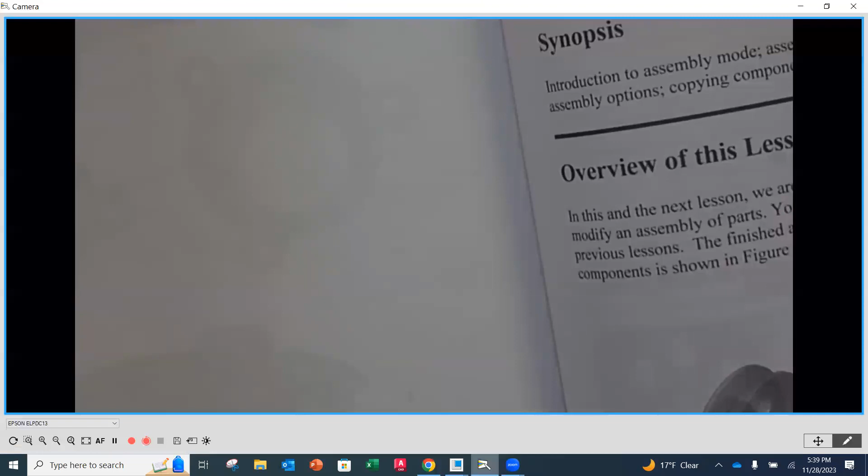It says chapter 9, and then it has axle and base and bolt and so on. These are the individual parts that you're going to be using to create the assembly in this chapter. Now it says here, read all of chapter 9 and work the tutorials of the support subassembly and the pulley assembly. So I'm going to open up our book and we're going to look there. Again, no need to download or click or anything right now.

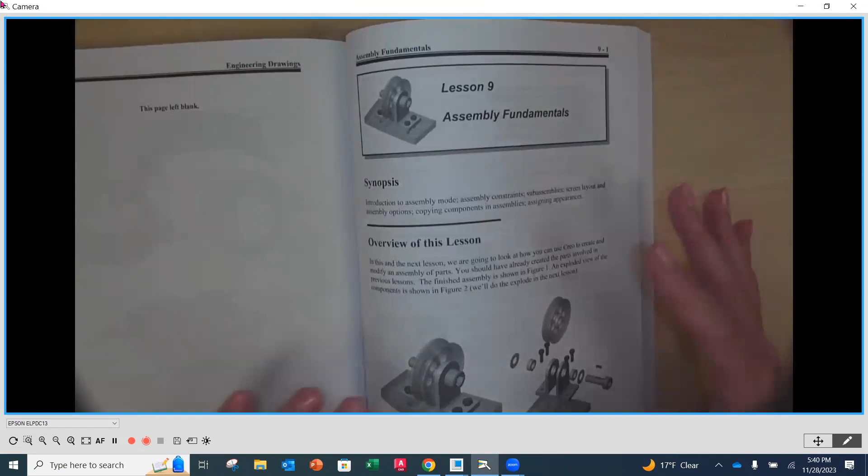So as we look at lesson number 9, or chapter number 9, assembly fundamentals, what we're going to be creating is this assembly right here. We're going to be putting this pulley and the L bracket together with an axle, a base plate, and then some fasteners that are going to fasten it down to that plate.

No clicking right now, please. I'm doing an overview of what your next assignment is going to be.

All right, so I want everybody's attention. Lucas, can I have your attention?

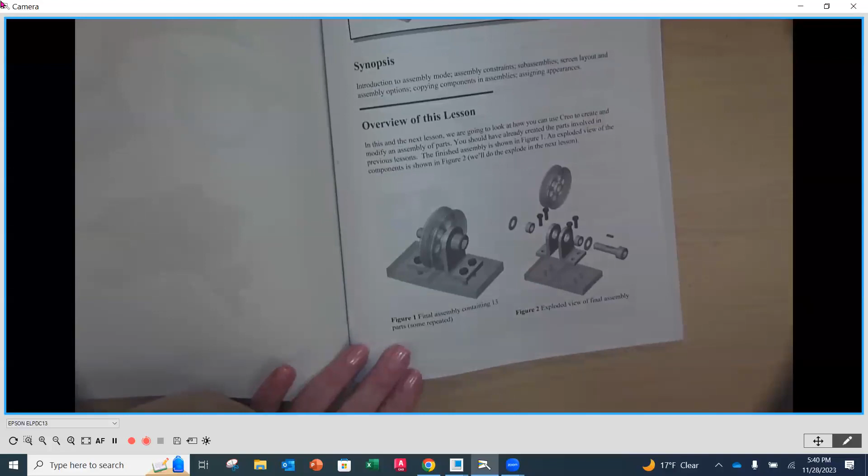Thank you. So as we look at this assembly, the individual parts are the ones that I have for you to download there. You don't have to create them. Earlier in this book, they were setting them up in different places.

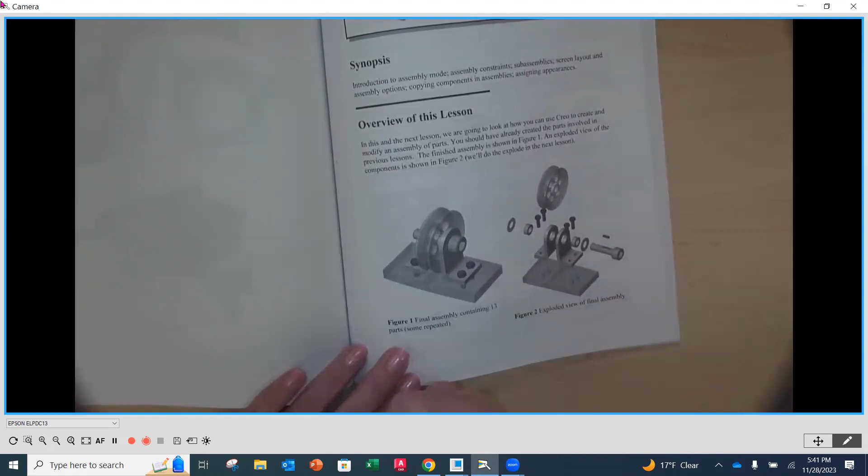We haven't been using the book all that much, and I apologize for that. I don't apologize, it's kind of not a great book, but I'm trying to use as much as possible because you purchased it. And so for this one, these are the parts that you're going to be using to put in there, so you don't have to create those. You're going to focus on just the assembly portion.

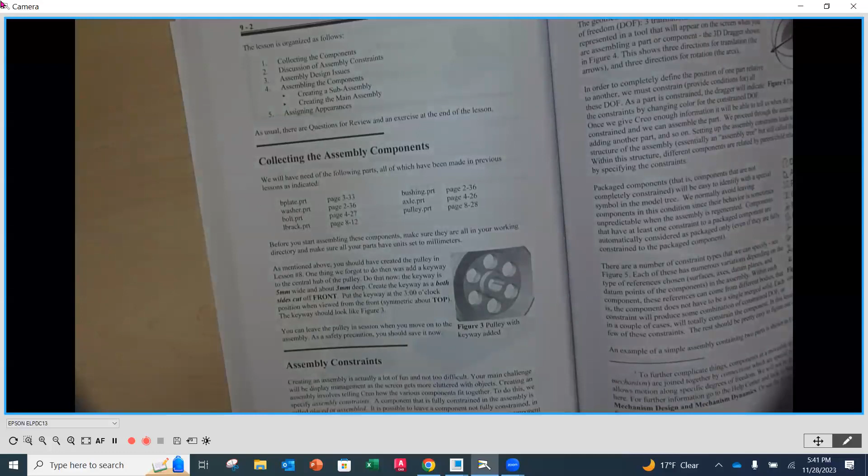Now, as we turn the page here, you're going to notice that they're going to do some background information on assemblies, and it talks about collecting those assembly components. Those are all set for you. You just download them from the Canvas page there.

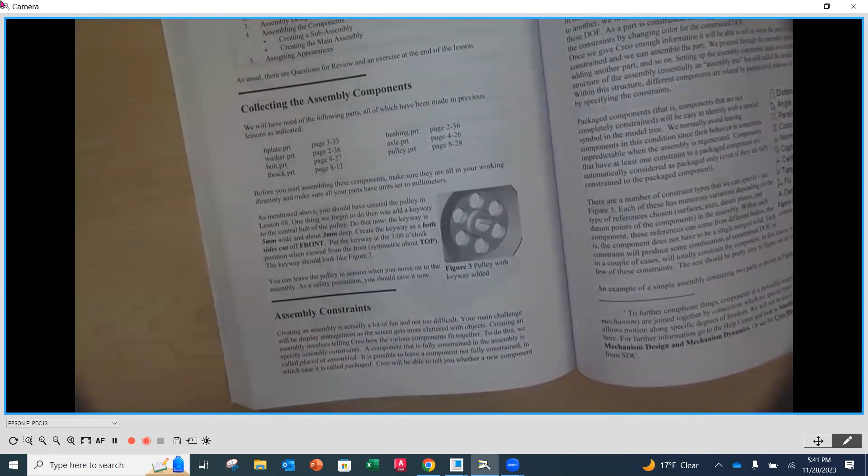And then it's going to talk about the different constraints. Now, I don't see the purpose of me just lecturing to you about these constraints. I think it's better if you go through and you actually use them the way the book is having you do them. I think they do a great job of having you test these out. They explain them and then they have you use them.

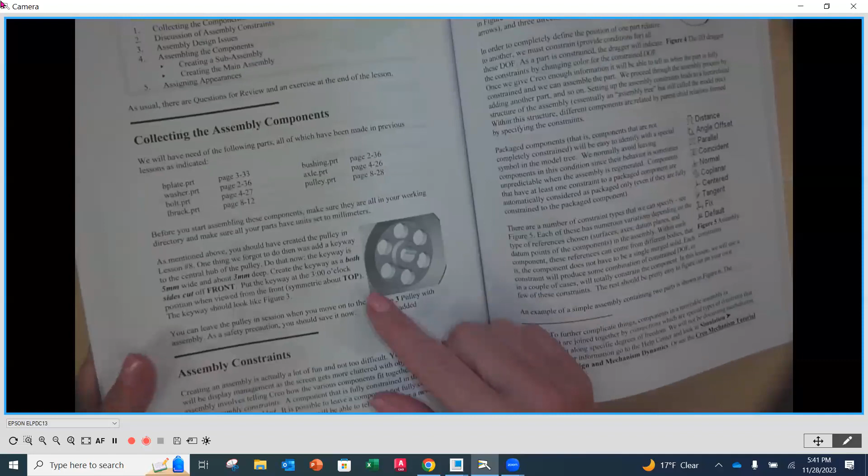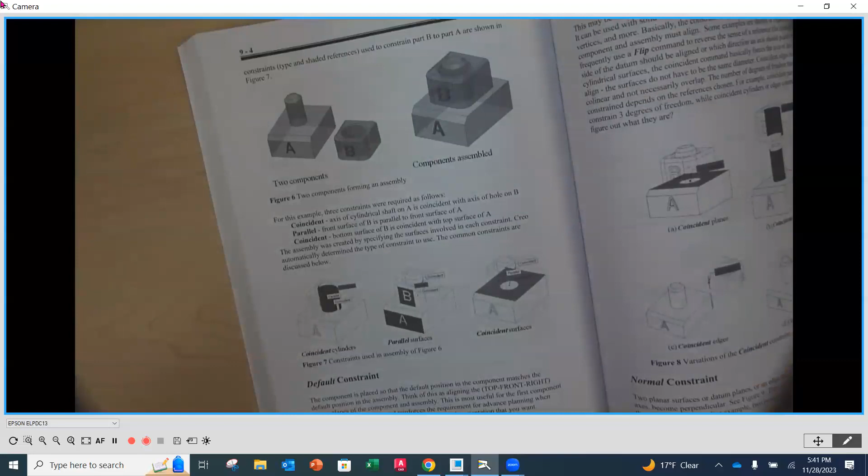So what you want to do is you're going to be reading through and exploring, getting the background and the detailed information about how to do these assemblies and what the constraints mean and how to actually put them together. You have a lot of experience now in Creo, interface-wise and stuff like that, so now I think it's good for you to kind of work through a tutorial independently and be able to glean all the information.

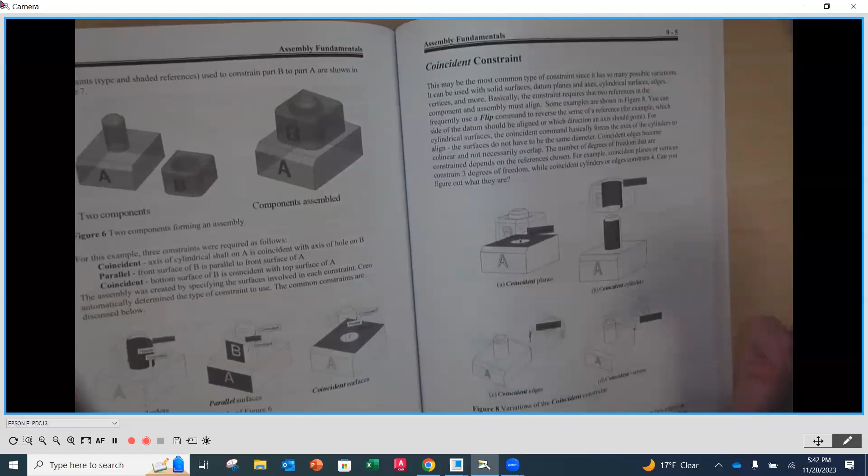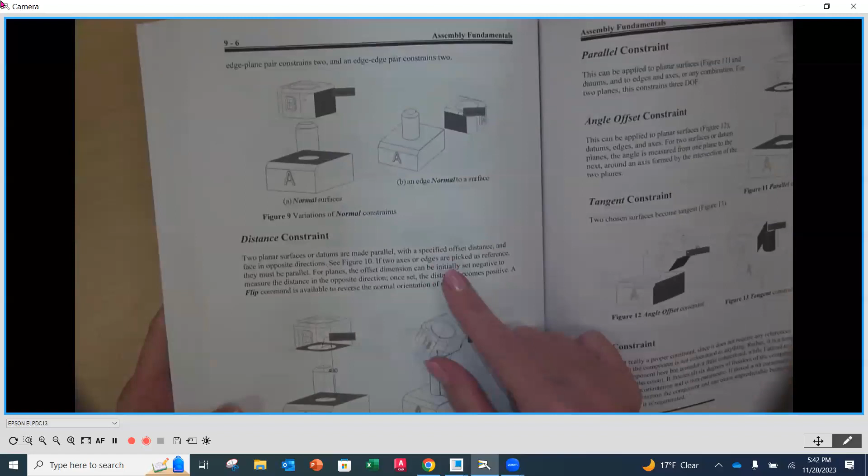So it's going to talk about the coincident constraint. This is one we're going to use a lot. And then there's some other ones. There's ones where you add a distance constraint. There's going to be parallel, angle offset, tangent, and it explains each and every one of these.

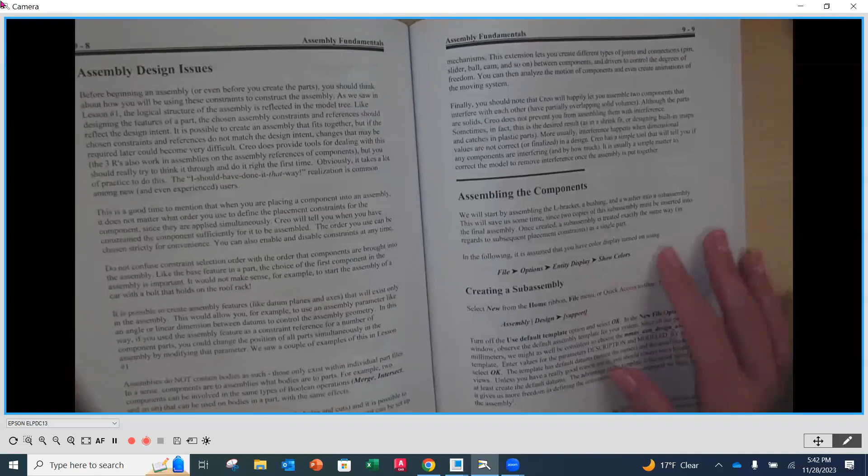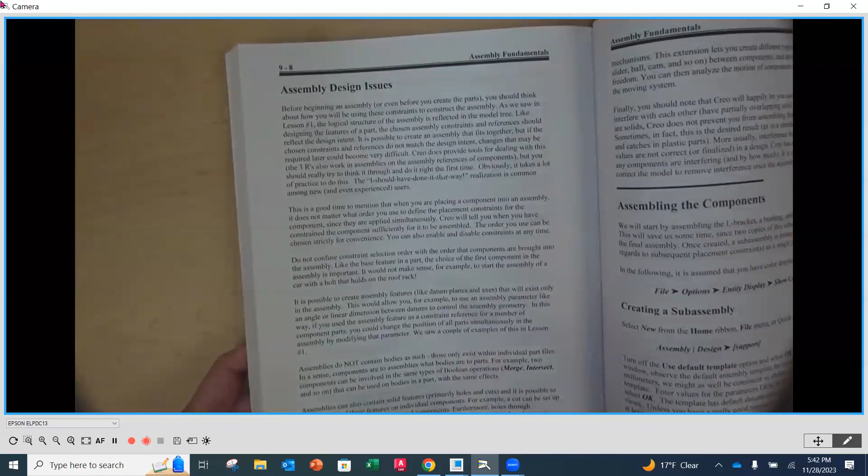Then it's going to talk about some assembly design issues that you might run into. These are important because these are things that come up, okay? And I want you to read this section and then do anything that they're asking you to do.

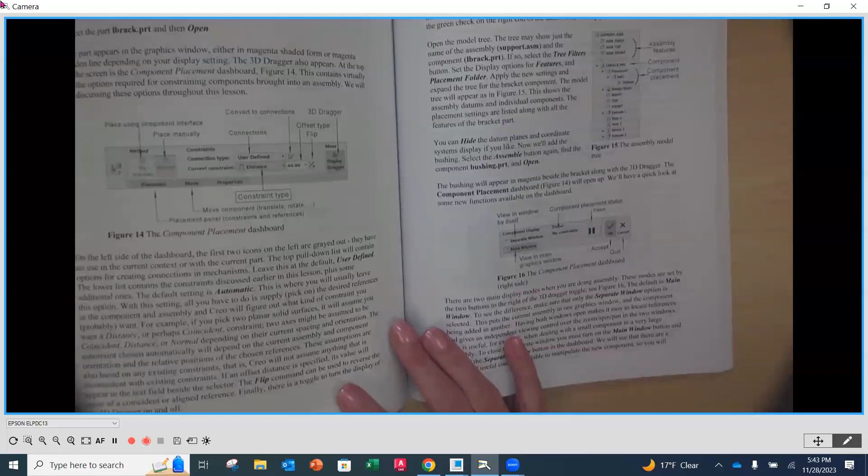Then you're going to have the assembling the components. This is when you're going to get started into doing the actual assembly. So you're going to pull in your very first part, which is going to be a subassembly that you're going to create for the support. And then it's having you bring in the L bracket, and then it's going over the interface and all the different items here.

When I do demonstrations, I get the feeling that, and I don't blame you, and that's why I'm having you do it this way, because I think it's going to be a little bit more interactive and more meaningful — when I'm trying to show you stuff, I think people are kind of off and running and doing their own thing because they're exploring some other things.

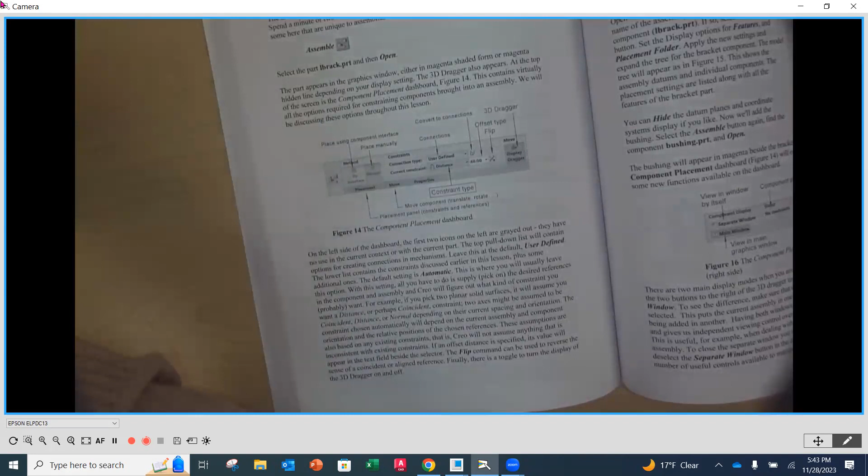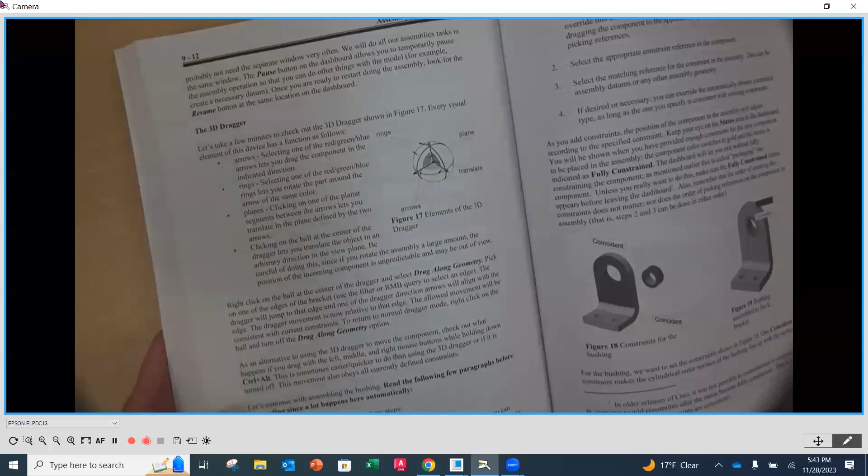And I get it, it's kind of cool to play with the software. But this way, you can get all the information here. So go through and work through each and every one of these, because they're going to have you toggle things on and off so you can see how they work, rather than just putting it together.

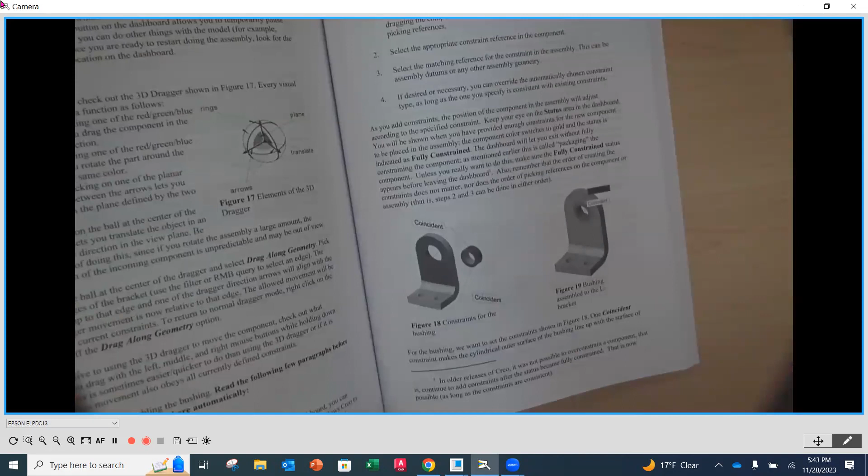You're going to be getting deeper into the different things. They talk about this 3D dragger and how it works. And then they're going to have you put this sub-assembly together. It's going to be the bracket, the bushing, and the washer. When you get done with this, it's going to be called the support.

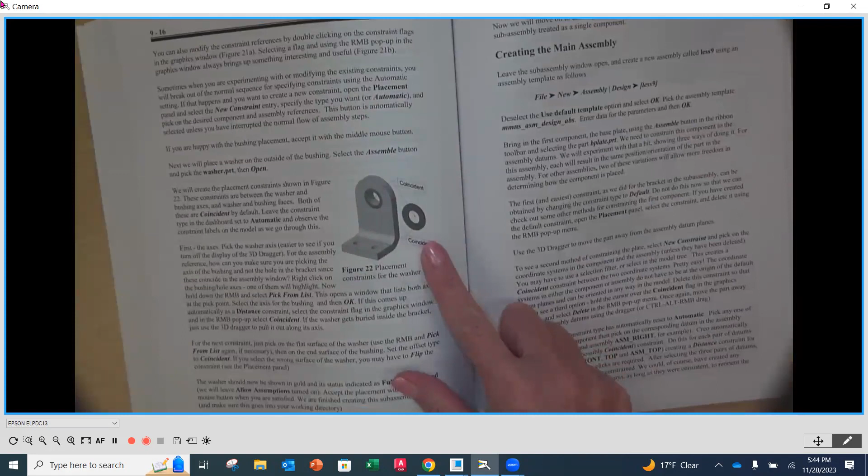You're going to put this washer in place, and you'll have a little support assembly. Once you get that washer in place and have just that support done, you're going to save it as a sub-assembly that you'll bring into the larger assembly. At that point, you do need to take a screenshot of the support assembly and upload it to the assignment. It's a screenshot, not a PDF.

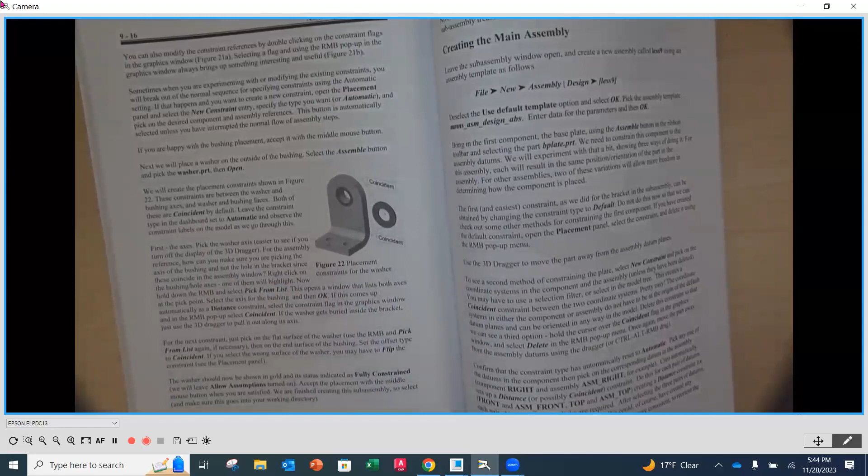Make sure that you add in the design tree, because I don't just want to see the model. I want to see how you put it all together, because when I see the parts listed, I'll know if they are fully defined or fully constrained or not. You'll find out how you know that to be true or not, and I'll know it by looking at the design tree. If it's not fully constrained, I'm going to send you back to make sure that you do.

It is important that you do. It'll let you assemble things, but remember, if you don't have things fully constrained or fully defined, bad things can happen later on. Like the next time you pull it in, it might be all goofed up and stuff like that. So you never want to leave, save, or let something be underdefined or unconstrained. They'll talk about why you want to do that.

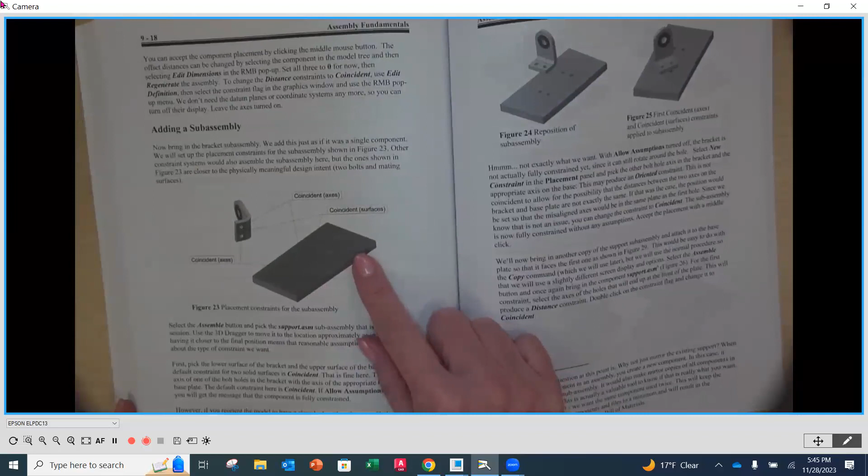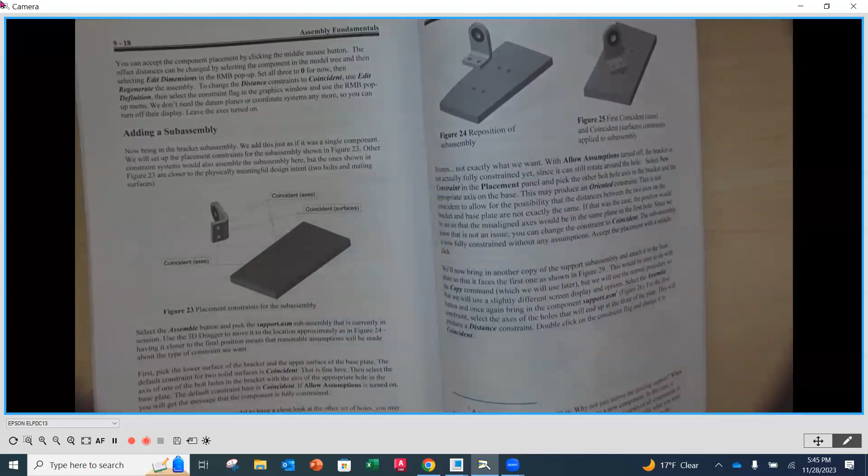Then the next thing you're going to do is create the second part, the main assembly. You're going to bring in the base plate to start - that's one of the files that you download. Then you're going to bring in that sub-assembly and place it on the plate, using some of those constraints that you learned about earlier in the chapter. Then you're going to place it, and it'll talk about how you're going to do that.

And then you're going to bring in the other support. They're going to tell you, do not mirror this support that you brought in, and they'll tell you why you don't want to do that at the assembly level. There's some good reasons. So I'm going to let you find out about that, but don't mirror at the assembly level just because it's like, oh yeah, I can mirror over the center line.

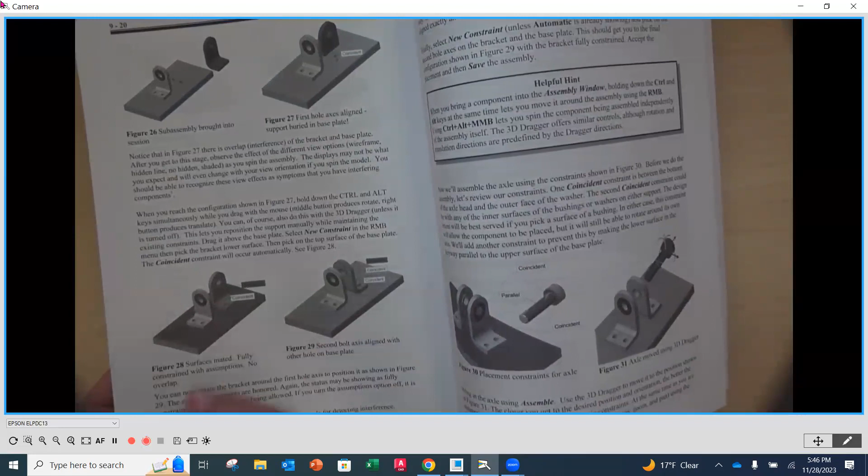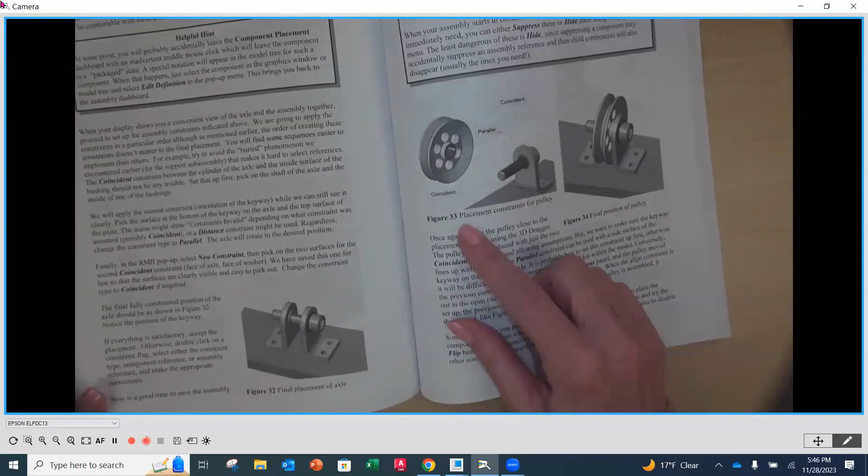Then you're going to be pulling in the axle and constraining that as well the way you need to. And then finally, you'll be pulling in the pulley. Once you get this in its final assembly, you'll want to call it the pulley assembly. And then you're going to take your screenshot and show me your design tree so I can see that everything is fully defined or fully constrained. And then you're going to upload that, and that's your assignment for the introduction to assemblies.

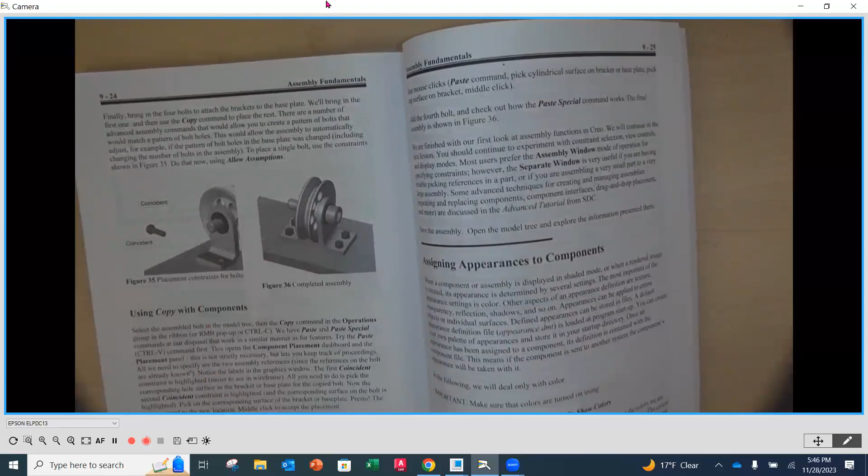So if we look back at the assignment down here, I'm going to go back to module 6, and we look at assignment number 13, the support and pulley assembly models. You're going to notice you get 10 points for the support assembly, 10 points for the pulley assembly, and you need to upload both of them, including the design tree, making sure that all of those parts are fully defined. So there's going to be 2 screenshots that you upload here once you're all done. And that's the first part of the assemblies.

Now, the second part, and this is where this book kind of falls down, is that as you look ahead in the next chapter, you would think, oh, we're going to probably make a drawing and pull in a bill of material and balloon. It's not in here. I know, I'm surprised too. So I'm gathering the resources so that we can go through that process. It's important.

You've got to be able to create an assembly drawing. So we're going to finish that up, but unfortunately it won't be in this book. We'll do it for this assembly, but I'll do the demo on that and show you how to go through that process and get you some resources for that.

I see there's a message in the chat: broken assemblies will ruin your life. Thank you, it's true. Even though it might look good when you're putting it together, if it's not constrained, the next time you pull it in it can be completely bonkers. It's really bad, so make sure you're doing that. That's one reason I want to see that design tree.